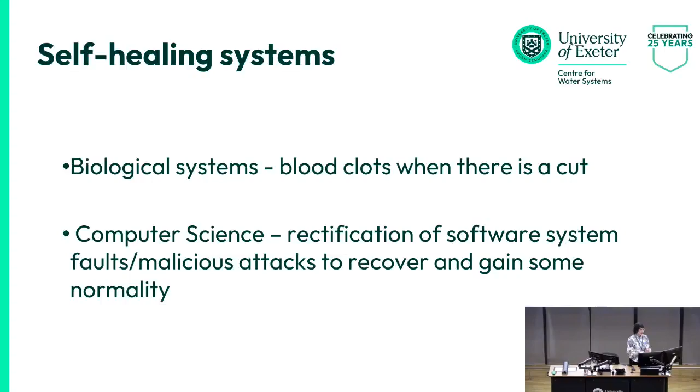Why is it important? Time and time again, we hear how aging assets are failing and causing a lot of disruption. In addition, we have got climate change that is impacting our buried assets and causing a lot of other issues.

For example, currently we are in a situation where 20% of the water is leaking in the UK because our assets are not in good condition, and we are losing valuable water that's got a lot of embedded energy in it as well through leaks. In addition, population is growing, demand is increasing, so it's very important that we balance supply and demand through other ways rather than relying on exploiting additional natural resources.

So what are self-healing systems? If we have got a system under normal state, it's functioning very well. And if we do some kind of maintenance, it will stay in that state for some time.

However, if we don't look after our assets, eventually they are going to deteriorate and move to a degraded state. We may have some capability to detect deterioration in our assets and do some predictive maintenance, not allowing them to further deteriorate. And also we may have some capability in our systems that self-protects and recovers from the degraded state, more like operational self-organizing, and goes back to the normal state.

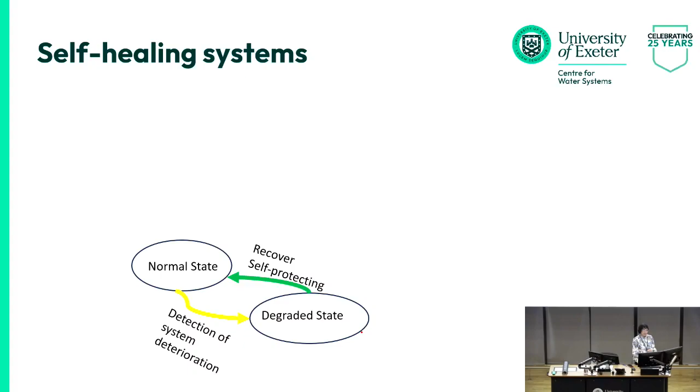However, if we don't maintain our systems, these degraded systems eventually are going to fail. And if we have got access to advanced computer science or materials, we may have systems that can detect that the system is starting to fail and somehow self-heal and go back to some normality.

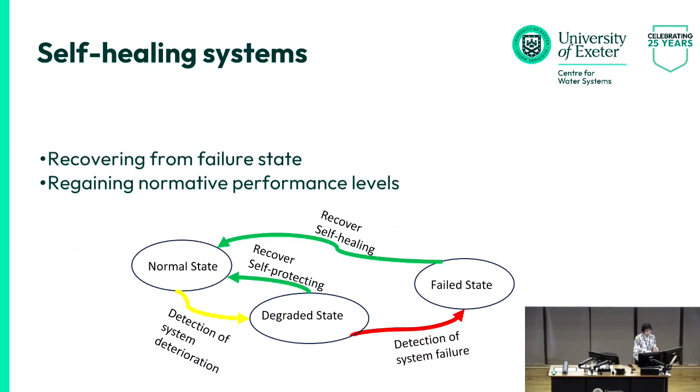Looking at other sectors, for example oil and gas, they are looking at different pipes with different coatings. For example, they have got pipes with layers of liquids that have self-healing agents, and they are activated if there is some damage in the pipe. It triggers the activation of these self-healing agents, and they start healing the parts of the pipe that are damaged.

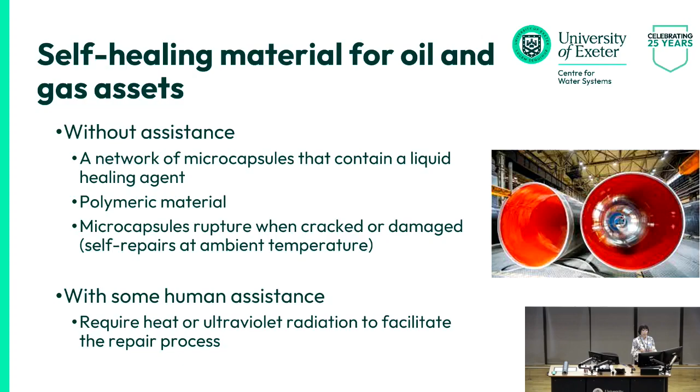In some cases it does this without any assistance. In some other cases, they have to do some support in the form of warming it, or some other human input, to be able to activate that self-healing process.

In the water sector, there have been more studies in the last couple of years. For example, currently there is a study in Australia looking at self-healing wastewater concrete pipes. The concept behind that is to use sludge, contributing to the circular economy rather than sending it to waste, using it as a self-healing agent in concrete pipes.

Another trial was carried out at Northumbrian Water in the UK last year. The idea is identifying damage in a pipe, such as a leak, and injecting water gel minerals upstream of that pipe, which will eventually fill those gaps and protect the pipe. To some degree this concept, especially the one trialed at Northumbrian Water, is assisted self-healing.

We have seen some of this in the past. For example, around 15 to 20 years ago, it was very common in the UK for water companies' asset management to clean and reline pipes - a no-dig approach, like the figure on the right-hand side. They were opening the chamber and passing the lining through the pipes, and when water was pressurized, this created a layer of protection for the pipe, blocking some leaks and improving water quality.

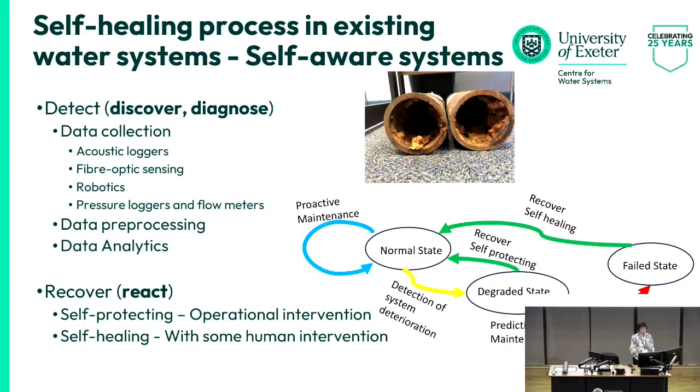So we have organized a workshop called Digital Solutions for Water Distribution Systems. The idea is to look at what we are currently doing - are we ready for when self-healing material technology is available, or for computer science extracting the best knowledge from these sensors? Are we in a position to use and benefit from those for the water sector?

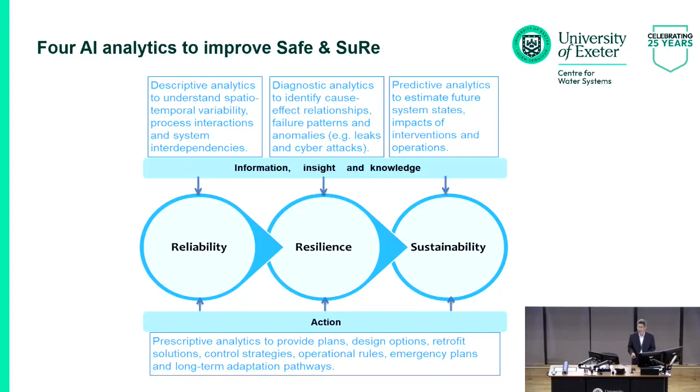It might be very difficult to predict what the future wastewater system will look like, but based on historical development it has become apparent that there are 5 pathways. I'm going to talk about each of these 5 pathways very briefly, using one example from my previous work.

The first one is greening. Green infrastructure has been gradually built into existing grey systems, providing multiple benefits — flooding, air quality, water quality, amenity, and many others. If you look at the flood damage curve, green infrastructure can help us manage more extreme flood events, like in this case, a 1-in-100-year flood event.

But in order to build resilient, flood-resilient cities, we need to tackle a lot of challenges using AI — to integrate green systems, and to integrate the physical and social systems, including community resilience measures. We also need AI to help us monitor green infrastructure and look at long-term resilience and real-time control.

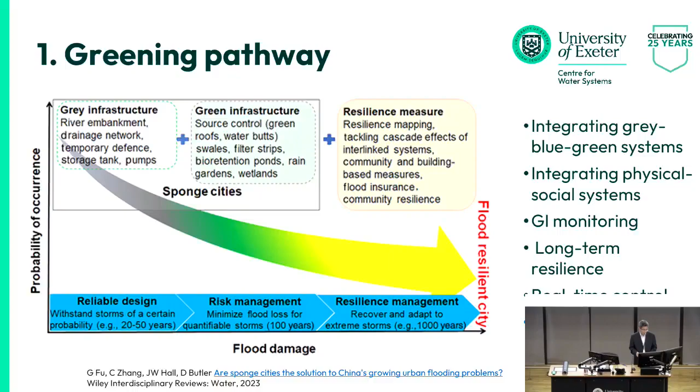The second pathway, decentralization. Obviously, there are many on-site wastewater treatment technologies and commercial units available. AI technology has been used to support planning and operation of this kind of decentralized system. But here, I'm talking about decentralized green infrastructure.

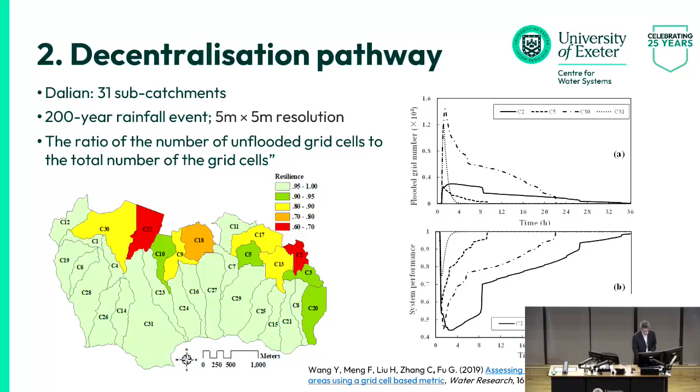The third pathway, decarbonization. We all know the UK industry aims to achieve net zero by 2030, but there are many challenges. The first one is greenhouse gas emission accounting.

We know emissions from sewers can potentially contribute up to 20-30% of the total greenhouse gas emissions from the wastewater system, but currently they are not counted. For on-site monitoring, we need new sensors and new data analytics. We have little knowledge about the greenhouse gas emission production process in the sewers and also in the wastewater treatment plant.

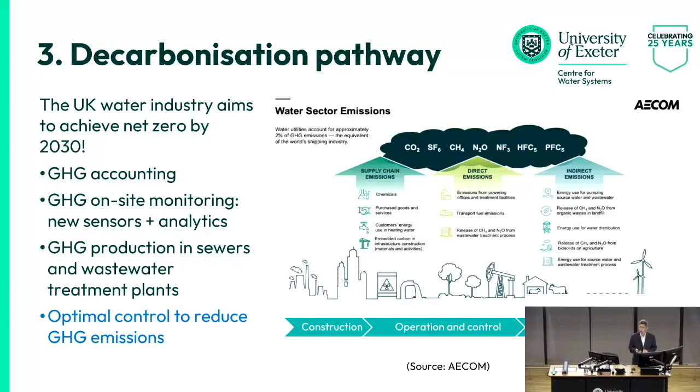So here I'll use one example to show the potential of optimal control on carbon reduction. This work was done by Chris Sweetapple. We looked at a benchmark wastewater treatment plant and applied multi-objective optimization, considering costs, greenhouse gas emissions, and water quality requirements.

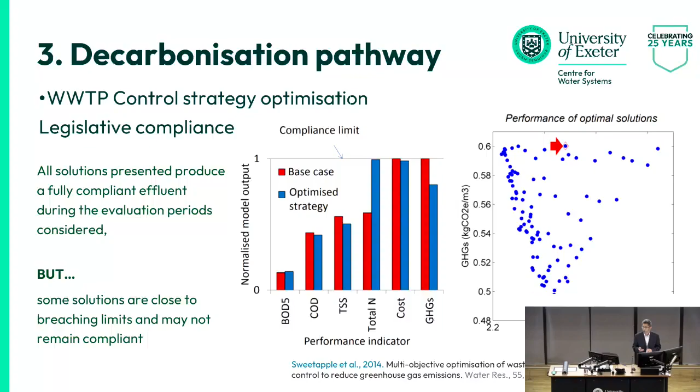You can see from here there's a clear trade-off between cost and greenhouse gas emissions. But there are some solutions at the bottom here that can reduce greenhouse gas emissions by about 20% with a slightly increased cost. These solutions all meet the water effluent quality requirement. This shows the importance of optimal control.

The fourth pathway, the circular economy. We proposed a dual loop framework to improve resource efficiency and sustainability. The outer infrastructure loop is important - we need to use a systems approach to understand the interaction between different systems and integrate various urban water systems.

The inner resource loop requires a deep understanding of the nexus between the 3 materials: water, energy, and materials. But the key challenge is to understand the interactions between the 2 loops, and the changing environment.

Here's one example on energy recovery from a wastewater treatment plant. We assessed over 300 control options to investigate the potential of energy recovery and its impact on sustainability. We used 7 indicators to measure sustainability, from A through G.

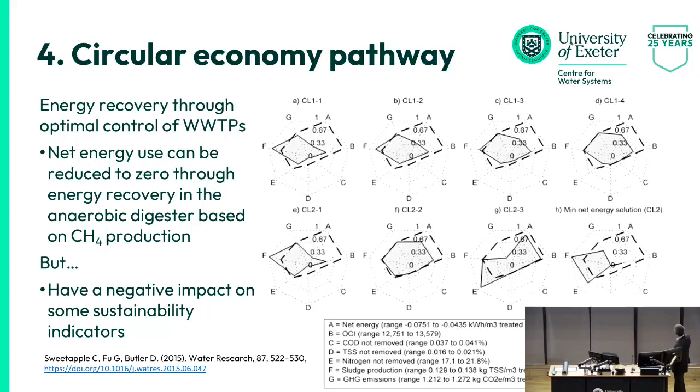A is the net energy use. We wanted to minimize all these objectives to move the curve basically towards the center of the graph. As a result, if you look at this one, it's possible to achieve energy neutrality through energy recovery, but it has a negative impact on sustainability - we have two indicators that get worse than the base case.

The final pathway, automation. This is the key area we have focused on in the past with several PhD students working on this topic. You heard from Maryam yesterday, and Farmani mentioned Chris Sweetapple already.

Basically, what we did was develop a number of global control and integrated control strategies to investigate various problems like system resilience and consenting, and look at climate change impact and adaptation pathways.

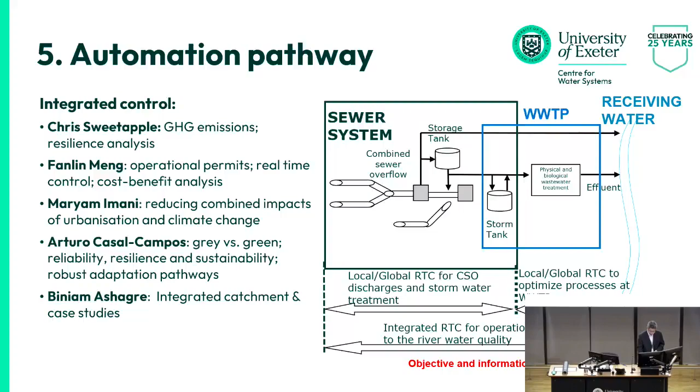Currently we have another PhD student, Chen Pei, working on deep reinforcement learning, which is an emerging new technology. It's very simple - it trains an agent through interaction with the environment, with the aim of maximizing the return, the expected return in the long term. Feel free to talk to him, he has a poster outside.

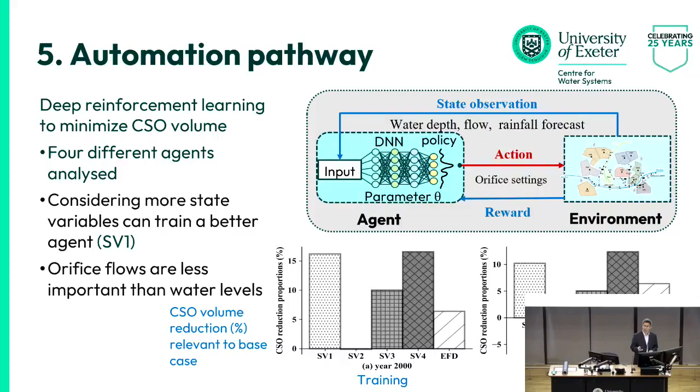So I'll just skip this one. We need to bring all 5 pathways together. It's important to emphasize the key challenge.

It's important to emphasize these pathways are not mutually exclusive. They are closely linked—sometimes, like the greening, decentralization, decarbonization. So one intervention option could potentially provide multiple benefits across different pathways.

So it's important to understand the synergies between different pathways and also to maximize the benefit using AI analytics. Obviously, AI technology has many features, as you can see here. So it's important to build tailor-made AI systems for specific water problems.

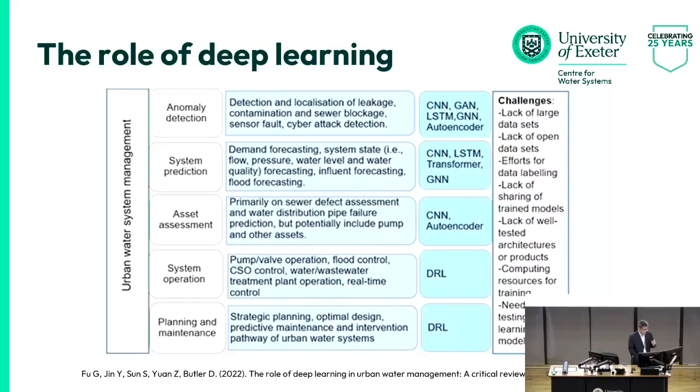So here is the overview of some water management problems which can be solved using deep learning technology. You can see I mentioned deep reinforcement learning here, so it can help us in many different aspects. We have a paper if you are interested to read about these.

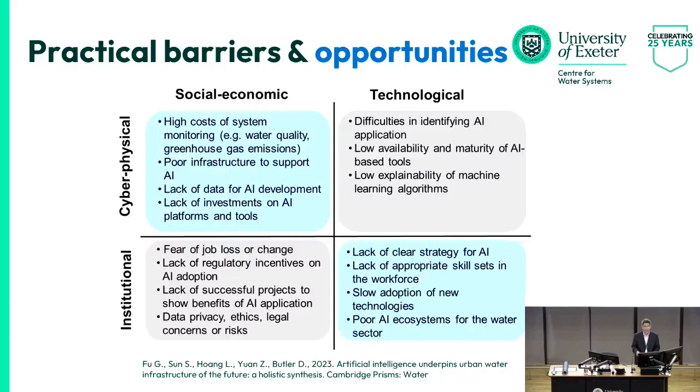So, what should we be focusing on at Exeter? My personal view is that we should make the best of our strengths to accelerate the integration of water research with AI to tackle the environmental and societal challenges.

We need to play a leading role in building cross-disciplinary research communities across water, environmental, computer science, social science, and many other subjects. Just before I finish, I wanted to share one thought from Garry Kasparov.

The world chess champion who played the famous game against the supercomputer, Deep Blue, back in 1997. You can see here: a weak human plus machine plus a better process is much more powerful than a strong human plus machine plus an inferior process. So do you agree with him? Or do you agree with me, or not?

I think in the future, we might need to treat AI as a team member rather than as a tool or algorithm. So a key challenge to tackle complex water systems—I think we need to develop leadership skills to build a team where AI and humans can work together, complementing each other through effective interactions.

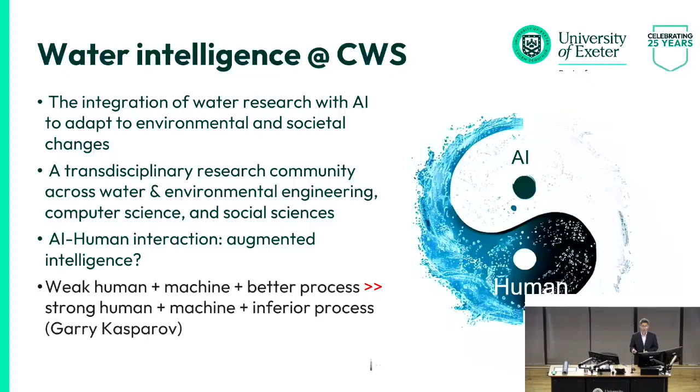Finally, I want to thank all of my collaborators and colleagues in the past, in particular in the past 18 years at Exeter. Thank you.

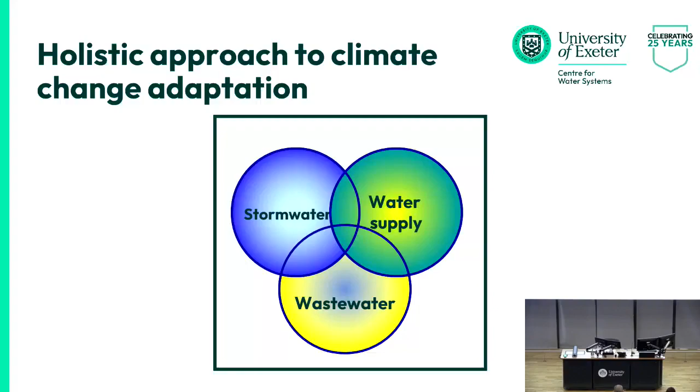Now, what I do, essentially, I look into these different domains: urban water flows. Obviously, there is the urban water system. So my niche is more or less looking into climate change adaptation. How? By integrating these individual flows, i.e. the infrastructure, not literally the flows, but the infrastructure, and making the most of the benefits that integration can bring by developing technologies and looking into the impacts they have or how they interact with the wider environment. More recently, I am venturing into the analysis of the system of systems - treating water as just one system and then venturing out to other systems. We need energy to produce water, and we need water to produce energy. We need both to produce food, and now the land nexus is adding more complexity - there is a competing demand on land for biofuels versus producing foods and so on.

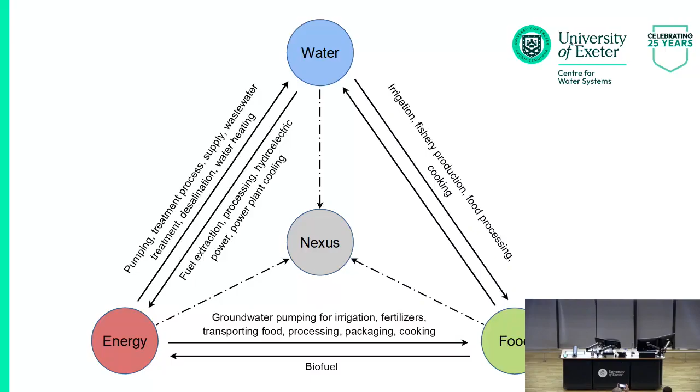Okay, so what we are going to talk about is essentially giving you a flavor of the processes. I've got four projects - some have finished, some are running in different continents, in different countries - and then we'll pick up something on the scale issue.

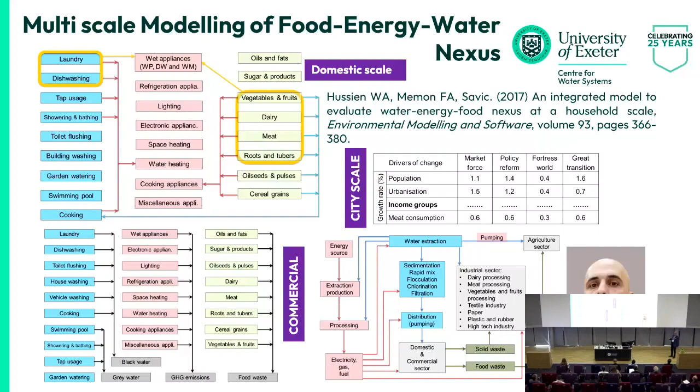This is the very first one, which we did for Iraq, funded by the Iraqi government. We looked at the micro scale, at a domestic scale - you've got different end uses of water, different end uses of energy, and we eat lots of different types of foods, and there are processes, hence energy implications. We looked at behaviors at a domestic scale, around 350 households in Iraq in different settings, looking into their demographics, socioeconomic conditions, and consumption behaviors, and then we came up with some interactions. Then we repeated a similar exercise on a slightly larger scale - non-domestic, i.e. commercial sector - and moved on towards the supply side of resource provision at a city scale, at a different level. It's not about the numbers, it's more about the processes here, I would say.

The third project I have was kind of an undergraduate project, not even a PhD project, at a different scale, but quite impressive. He was my project student, and then he moved to the MSc level as well. Here, what we looked at - Spain is very famous for their agricultural produce throughout the world.

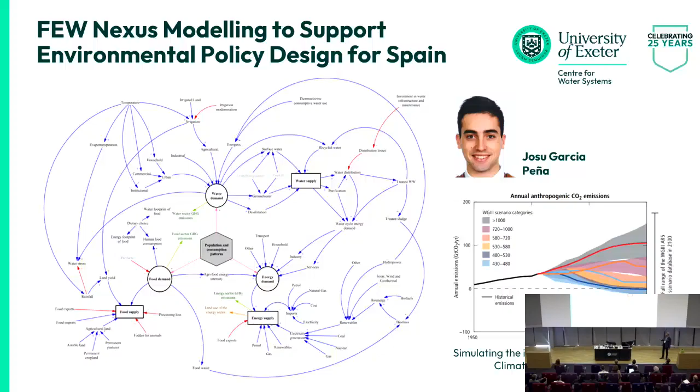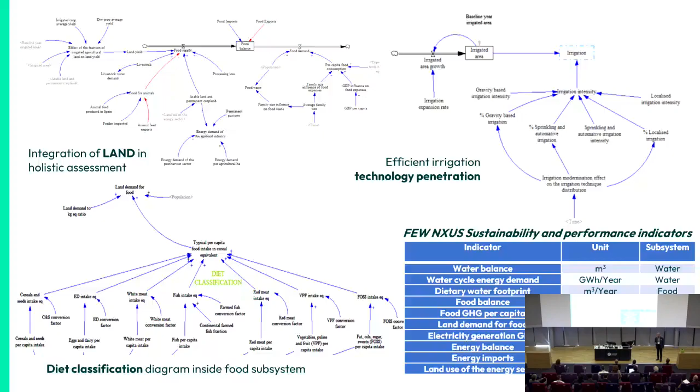We applied that bigger tool using the Spanish version of climate change scenarios for carbon emissions and so on, then measured the performance of the Nexus for policy derivation using a number of indicators. Again, the focus has been on performance - the quality of the output is very much dependent on the data.

The fourth one and the last one - then I'll leave you with a slide on what to do next. The fourth one is an ongoing PhD, and I admire this lady, my PhD student. Just before going for her wedding ceremony three days ago, she managed to email me some slides just to save my soul. So best of luck and best wishes to her, which I'll communicate from you guys as well.

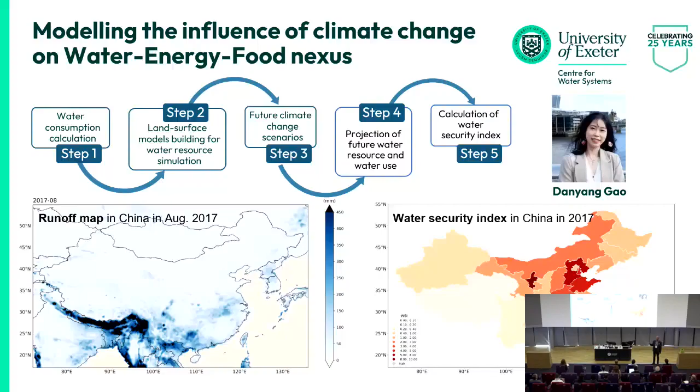So what we had were the climate change parameters. We use a simulation tool called JULES, which takes climate influencing parameters into account and gives lots of hydraulic analysis, one of them being surface runoff. Using that, we did backcasting on how much water is used for crops, energy, rural and domestic water supply, demand balance, and so on, and came up with a yearly water scarcity or water security index for different provinces of China.

Now here you can see there is lots of water availability on the graph on the right side, but there are provinces where you can see a clear deficiency in water. Using that tool, we applied this for a number of conventional climate change scenarios, and on top of that, socioeconomic scenarios and combinations of those. Again, this is ongoing work - let's see what comes out as a result of these scenarios on a longer scale, say 50 and 100 year forecasts.

Moving on, the last slide I have here - where shall we be going? I'll give myself a pause a little bit for you to digest, and then we may be able to discuss. Obviously, these days we have the cost of living crisis, and obviously it is going to influence human behaviors. How it is going to permanently or temporarily influence the water, energy, and food nexus is something that can be looked into.

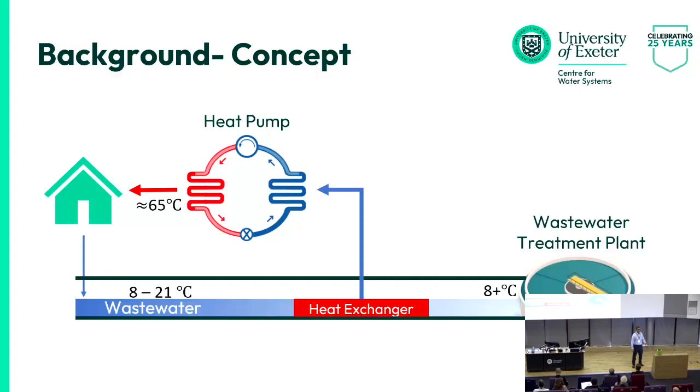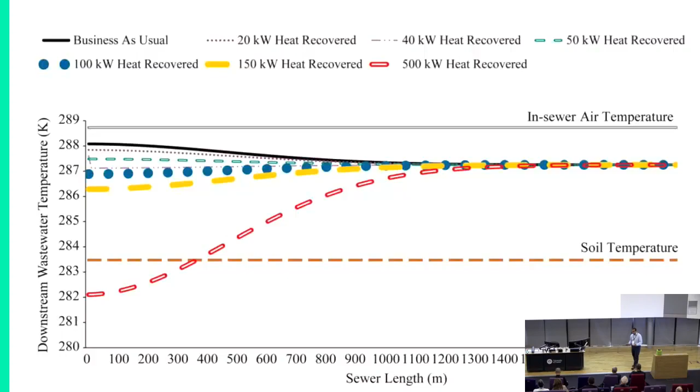So, early models have shown that when you recover heat - the solid black line is business as usual with no heat recovery. If you recover, let's say 20 kilowatts, then the difference is insignificant. But if you recover 500 kilowatts, there will be a large drop at the beginning, and then the temperature will increase because the heat is reclaimed from the surrounding air and soil, and you reach the business as usual case after maybe 1 kilometer of length.

Why is heat recovery important? It's because a large portion of carbon emissions comes from heating, and the coefficient of performance, that is the ratio of output to input, matters because you are using electricity for a heat pump. So the output heat over the input electricity, that is the COP of a heat pump.

Currently, the government is promoting air source heat pumps, but those have relatively low COP, around 2 or 3. But with wastewater heat pumps, you have 4 or even more. Sewers are everywhere, close to the heat demand location, so we have a large potential of heat from the sewer that is close to the consumer.

Also, the heat recovery from wastewater can benefit other processes. For example, the reduction in wastewater temperature may reduce the formation of hydrogen sulfide.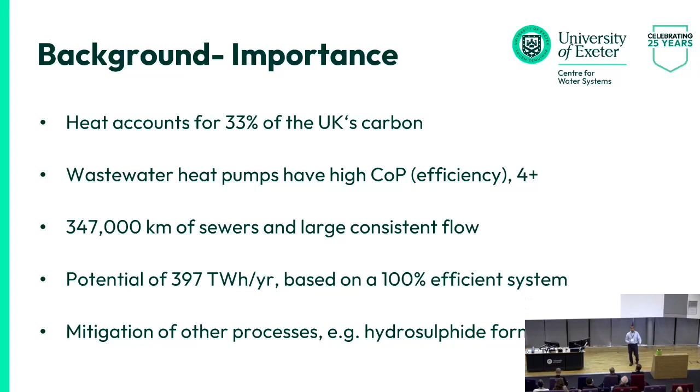The heat transfer between wastewater and in-sewer air is complex. We have addressed this and managed to estimate it accurately. We then applied this to a large sewer network of 3,000 pipes.

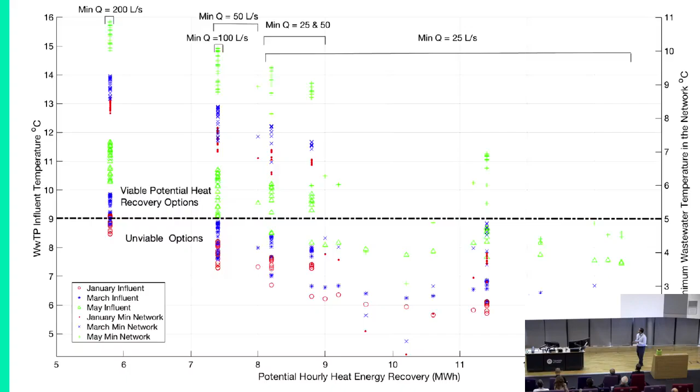However, what we have found is the modeling accuracy can sometimes be low. This is a Taylor diagram - you don't need to be familiar with it. All you need to know is that an accurate model will show a modeling error closer to 1, no more or less than a deviation of 1. So the closest to this point, the more accurate the model.

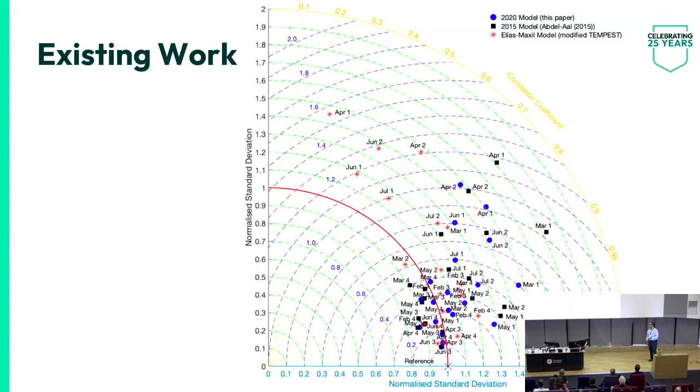You can see the model has performed well in the majority of cases. These are different models - mine and other authors' as well - at different months. We noticed that April and June showed particularly higher modeling error for my model and also for the other models. This suggests there must be some missing process that we haven't accounted for, and the exact reason is not clear yet.

So this inconsistency in modeling error needs to be investigated. We also found that the peak of heat recovery is lagged by around a couple of hours in comparison to heat demand. So if we can manage to store the recovered heat, that would enable us to optimize the heat recovery process and attempt to meet the heat demand.

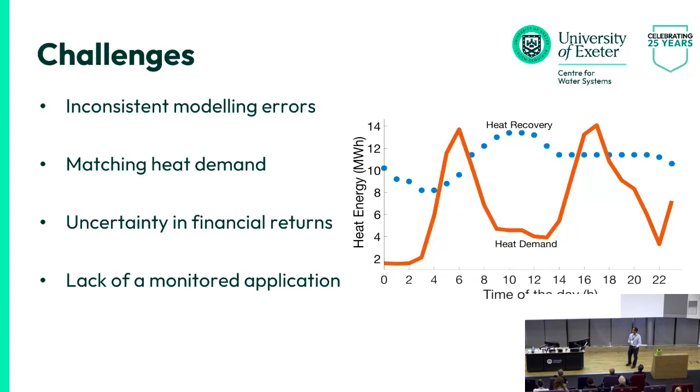What else? We don't know the financial return, and there hasn't been published literature in terms of heat recovery from sewer networks and how that can benefit stakeholders.

So the future goal would be to advance the heat transfer process and investigate these uncertainties in modeling errors - we'll talk about each goal in more detail - and also optimize the heat recovery in spatial and temporal terms, and develop a business model to estimate financial returns and identify stakeholders. Once that's all done, we can apply it in a field study, because this is one of the main barriers for companies, that they don't know how this is going to benefit them financially.

So we need to improve the understanding of heat transfer processes and also adapt the model to be a transient model, because when we consider heat storage and optimization, the model needs to be transient. And we need also to develop a smart storage technique.

To do all of this, we need to apply the heat recovery process and understand the heat transfer process, all in a controlled laboratory environment, but at full scale. Currently, as far as I'm aware, there's no controlled environment where this has been implemented.

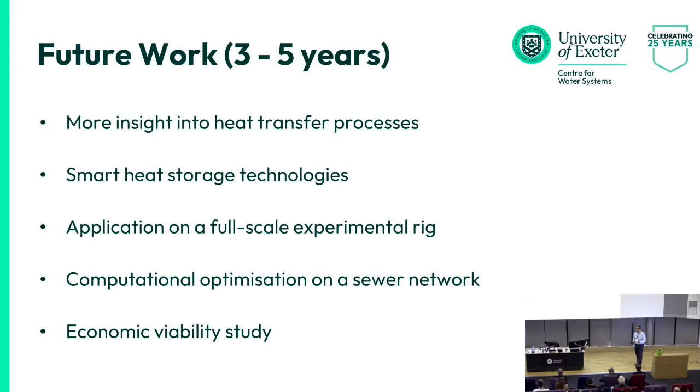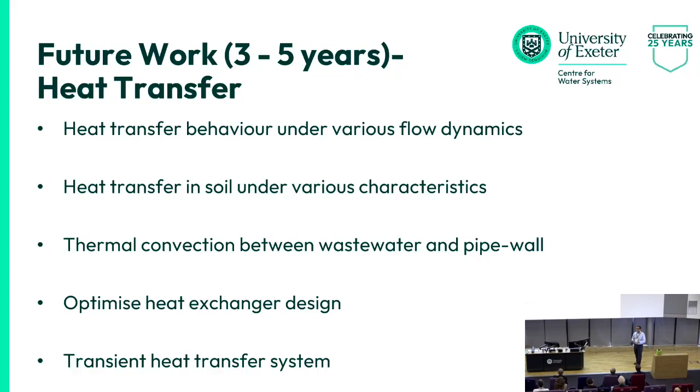The heat transfer process is complex in sewers, so we try to test the system under various flow dynamics, under various soil types, and measure the thermal conductivity and other parameters. Also, the thermal convection between wastewater and pipe-wall has been based on assumptions most of the time. And the heat exchanger itself, because it's a small confined space in the sewer, needs minimum size with large capability of heat extraction.

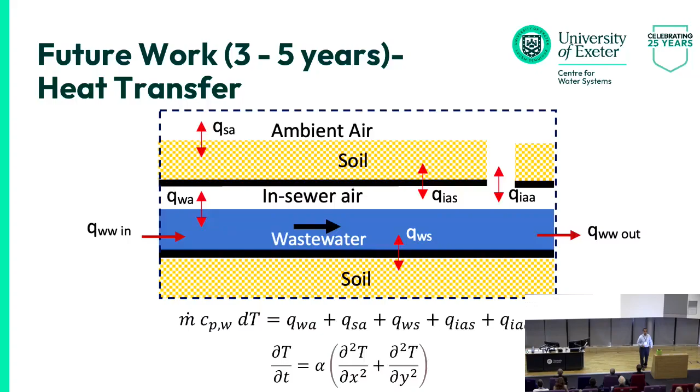So the new model will look something like this, and will account for other heat transfer processes: between in-sewer air and soil, between in-sewer air and ambient air, and also the convection between wastewater and the pipe, or at least investigate the sensitivity of these parameters.

For heat storage, the idea is to use existing infrastructure in the sewer and develop a smart system for heat storage through real-time control, or use storage material, or a combination of both. It's estimated that heat storage material would require around 3 to 4 cubic meters per household to cover the annual heat demand.

This is an experimental laboratory rig in Sheffield that I'm aiming to use, because here we can change the soil, change the characteristics of the soil, and change the thermal conductivity in the groundwater. So we study the heat transfer processes without any heat recovery, and then we can deploy a heat recovery system and a heat storage system under a controlled environment.

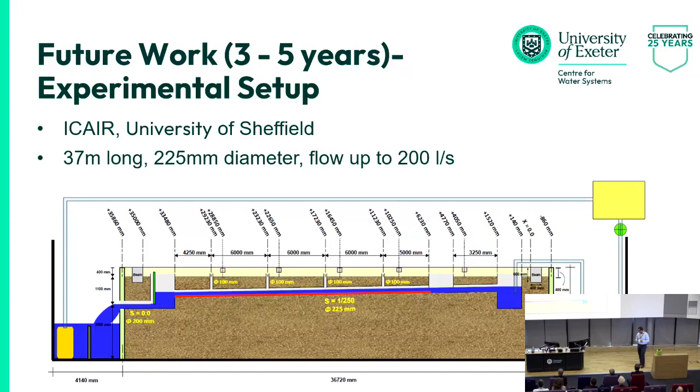So once that's done on a single pipe, then we can optimize the heat recovery in a sewer network. This is complex as well, because when you recover heat from upstream, that will impact the temperature downstream, and therefore impact how much heat you can recover downstream.

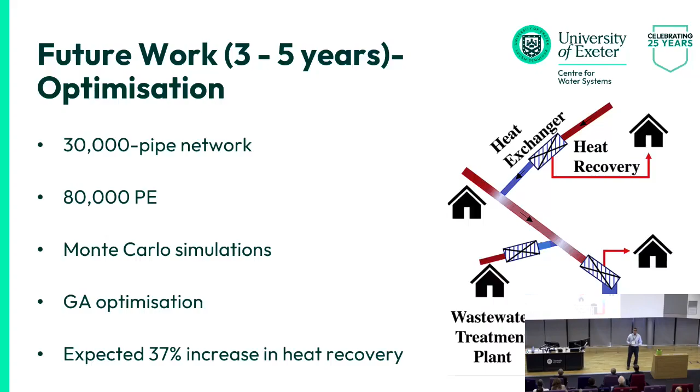And that is only first generation, but then you have first and second generation, then third, fourth, up to maybe seven generations of sewer pipe in this network. So it can be done, it won't be an optimal solution, but we can start with Monte Carlo simulations or genetic algorithms.

And then once the network model is optimized, we can apply it on a field study where we monitor temperature and validate the optimized model, and also validate the business model.

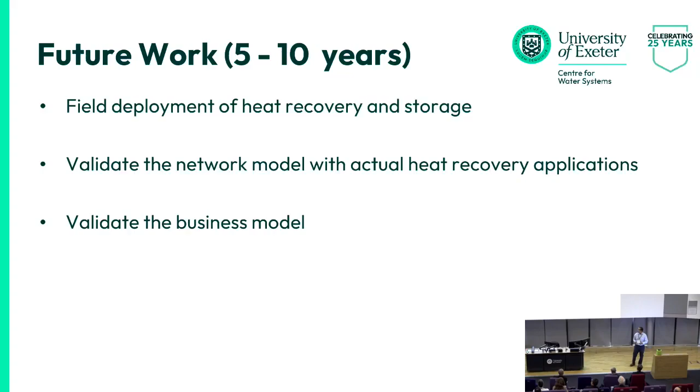Once implemented in a field study, it can break some barriers and be spread out on different networks in the country. We need also to review the performance and scale the potential of integrating renewable heat with other renewable sources at the time.

Obviously, with something like this, we need to collaborate with water companies and consultancies and break these barriers so they're more confident in taking this on board. Also, the heat exchanger manufacturers need to be updated on what can be done, since it's a unique setting. City councils, health education, they're all important in this project, and universities as well.

To summarize, we need to focus on the heat balance equation and make sure all the processes are included, then apply heat storage using a transient model. Apply all of this at lab scale, which will enable us to confidently apply it in field deployment, and also monitor the main parameters and validate our business model and network model. Once that's done, we can expand the technology and be more confident in applying it across the network. Thank you very much.

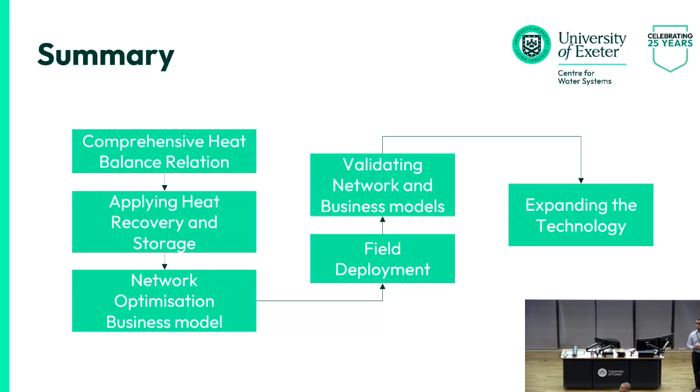Thank you very much, very interesting. My name is Mohamad, I'm from Krüger in Denmark, where we do optimization of wastewater treatment plants and sewer systems. In Denmark, we already today have heat exchangers at the wastewater treatment on the effluent. For some reason, they don't want them at the inlet, and they tell me they don't want to extract heat from the water before it enters, they don't want cold water to enter the wastewater treatment. During winter, they're very unhappy when the snow is melting, going into the sewage, cooling down the sewage, and getting slower biological processes. Have you got any idea how much you will change the temperature of the sewage when you start using the exchanger and extract heat from the sewage?

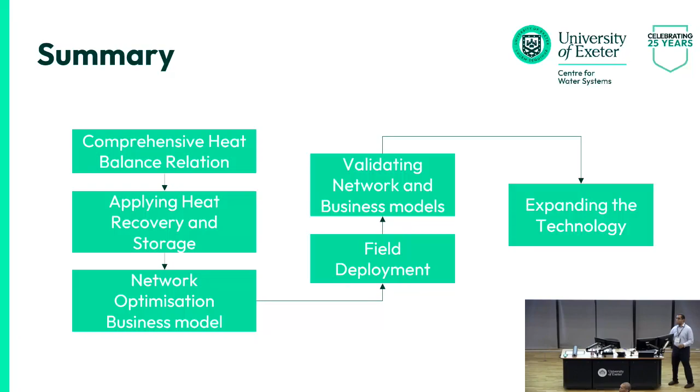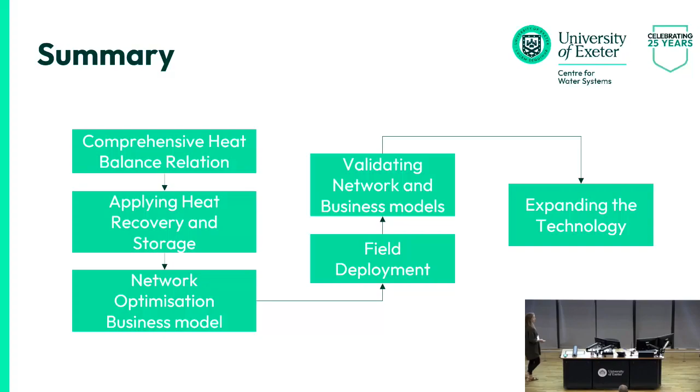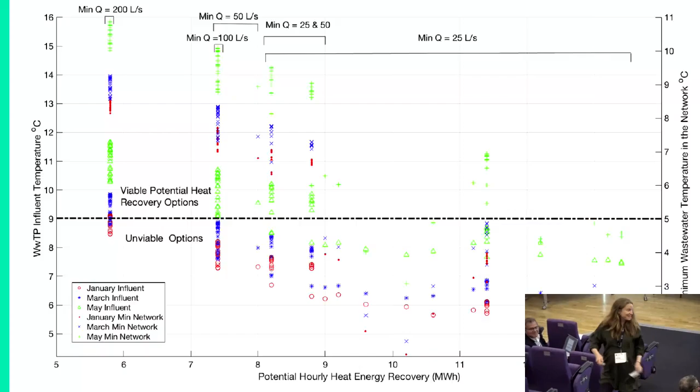You just want me to do more exercise. No, I think I understand it. The question is how much will it change the temperature of the sewage? Yeah, so it will depend on the flow and how much you recover.

What I want to show you is that you have a number of options. For example, if you are worried about the temperatures and it is winter, you only recover 6 megawatt hours, and that will have a lot of viability. But if you increase recovery, the model or your control of how much you recover has to be dynamic, ideally in a real-time control system. If your wastewater temperature is 5 degrees Celsius, you don't recover anything. But if it is 10 or 12, then you can recover upstream, and the wastewater will increase in temperature because of the surroundings. So it has to be a dynamic, real-time control system.

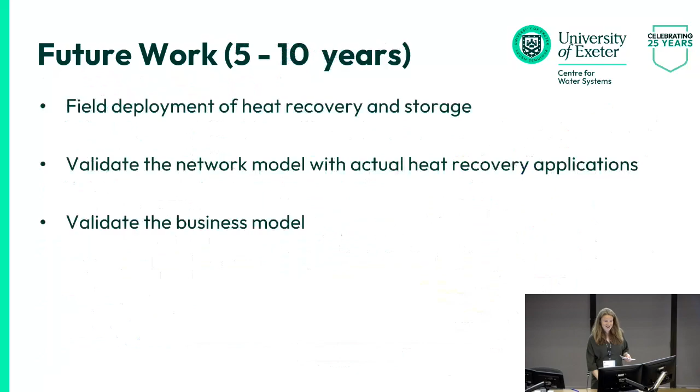Good morning everyone, I'm Akbar Javadi from Center for Water Systems. In this presentation, I'm going to talk about the research we have been doing in the last 15, 16 years on groundwater modeling and groundwater management in coastal aquifers, mainly under the effect of seawater intrusion and climate change, and our journey through this process and the future direction as we see it. I would like to acknowledge the contribution of some researchers, PhD students, academics, and international colleagues in this field.

My research is mainly computational geomechanics. I'm a geotechnical engineer, and in the last 22 years we have had over 70 researchers contributing to research in the fields of geotechnical and geoenvironmental engineering. We work in areas of geoenvironmental engineering, geotechnical engineering, application of engineering optimization in geotechnics and geoenvironment, and also application of AI and machine learning, either as a standalone tool or integrated into computational simulations.

In this presentation, I'm going to talk about modeling of groundwater resources in coastal aquifers, a model we have developed for simulating seawater intrusion, and a new methodology we have proposed to control seawater intrusion, and studies we have done on the effects of sea level rise and its effect on seawater intrusion, and applications to some real-world case studies, and then I'll conclude with some suggestions for future research in this field.

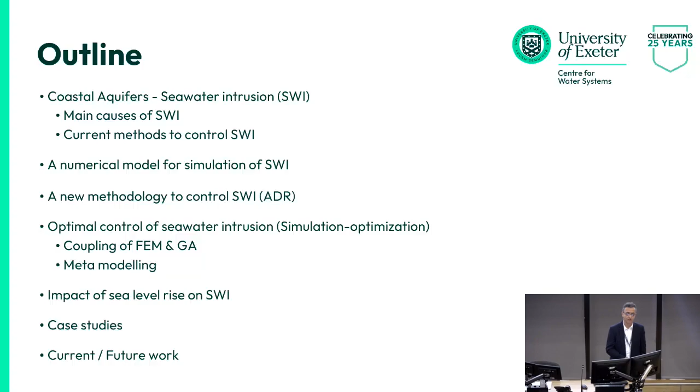Generally, about 70% of world population live in coastal regions, and many of these regions depend on groundwater as a main or, in some cases, the only source of water supply. In coastal aquifers, we have groundwater, freshwater, in contact with seawater and saline water, separated by a zone of dispersion, which is a dynamic zone, not static. There's a growing population, which results in increasing abstraction, and if you increase abstraction, this zone will move towards the aquifer and salinity will intrude, causing contamination. On top of that, we have sea level rise, which increases the head of water on the saline side, which again helps with intrusion.

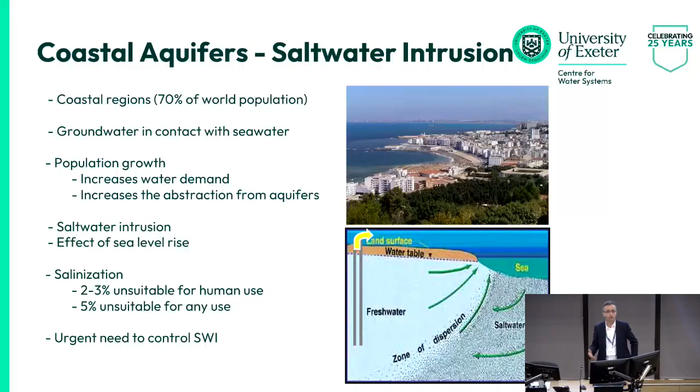The problem is that a very small percentage of salinity in soil or water can make it unusable for human use or any other use. There are many countries around the world who have either lost their groundwater resources or are in the process of losing groundwater resources. So it's a very important challenge.

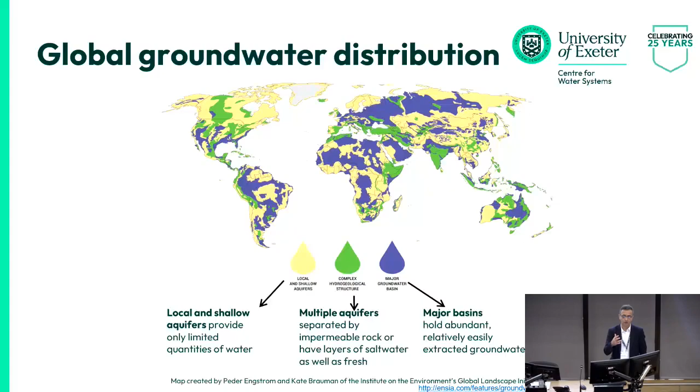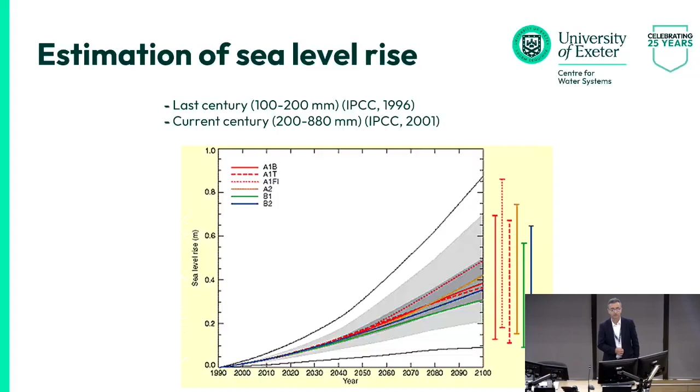And with climate change, according to IPCC, in the current century it's expected that sea levels will rise something between 200 millimeters to 880 millimeters, depending on different climate change scenarios.

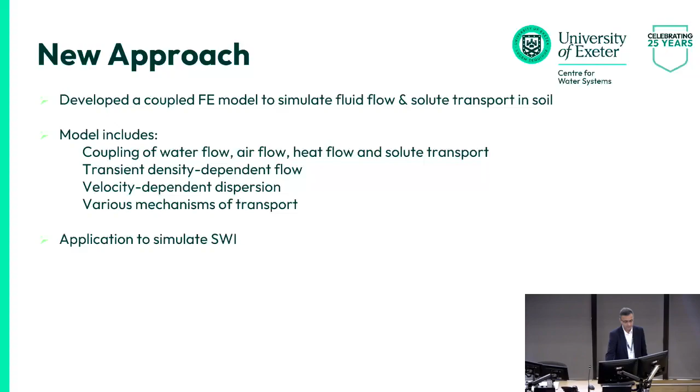So in this research, about 15 years ago, we started with developing a computer model for simulating flow and contaminant transport, and then we adapted it to the problem of seawater intrusion. We studied a lot in this field, a lot of case studies, real world or hypothetical cases, and we proposed a method for controlling seawater intrusion based on a combination of abstraction of brackish water and at the same time recharging the aquifer using treated wastewater or other sources of water. Also, in countries that suffer from shortage of water, we could have an option of desalinating the abstracted water and using it as an additional source of water.

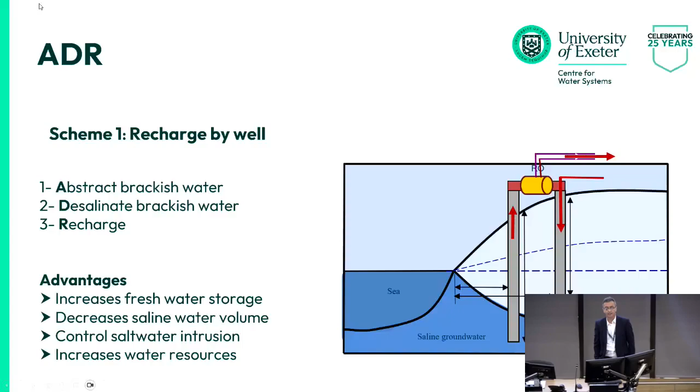This is a method that we have proposed. Obviously, we need to know what is the optimal arrangement in this proposed method. We use some simulation optimization models, and we've compared our proposed method with some of the existing models, which are based on abstraction only of saline water or recharge of aquifer only.

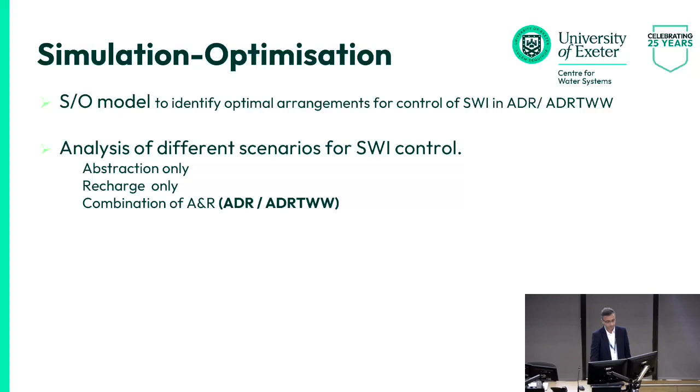So we applied it to a benchmark case study. This was one of the early applications of that, where we formulated the problem as an optimization problem of identifying the optimal locations for abstraction wells and recharge wells, optimum depths for these wells, and the optimal rate at which we can abstract water and recharge, to minimize the cost and minimize the salinity in the aquifer, subject to some practical constraints.

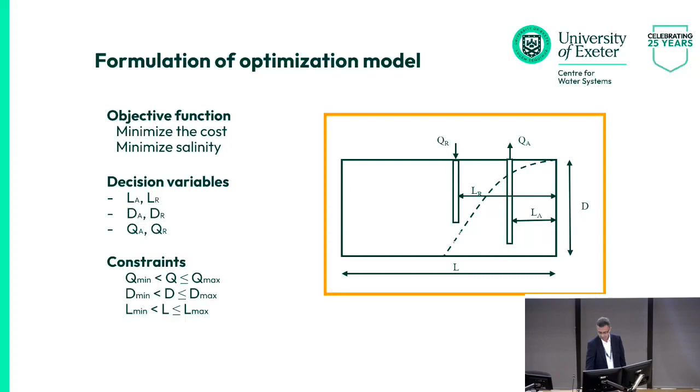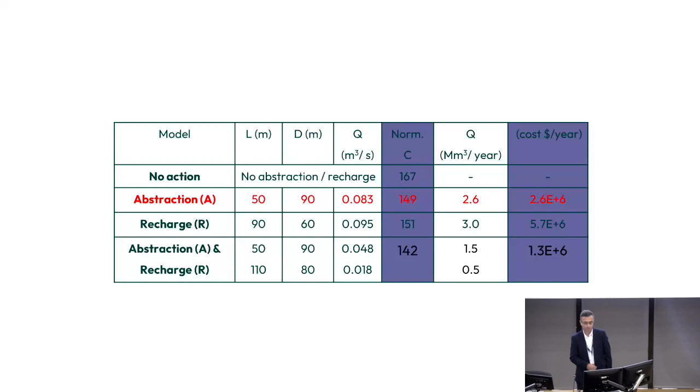Similarly, the recharge method, which is a conventional method, requires an optimal arrangement shown here, but reduces salinity to 151 at a cost of $5.7 million per year.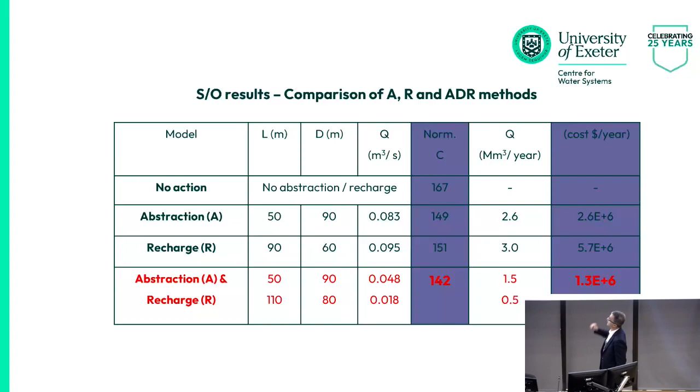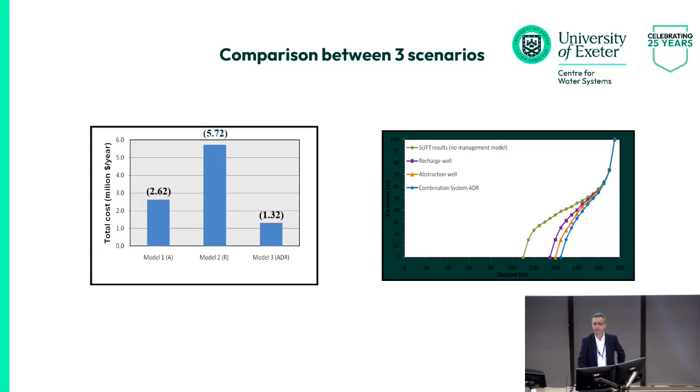Our proposed method requires an abstraction well in conjunction with a recharge well, but reduces the salinity significantly more, to 142, at significantly reduced cost. If you compare the cost directly, our proposed method, ADR, the bar on the right, is about half the cost of abstraction only and about a quarter of the cost of recharge only. And it pushes the interface between freshwater and saline water further towards the sea, protecting the aquifers very efficiently.

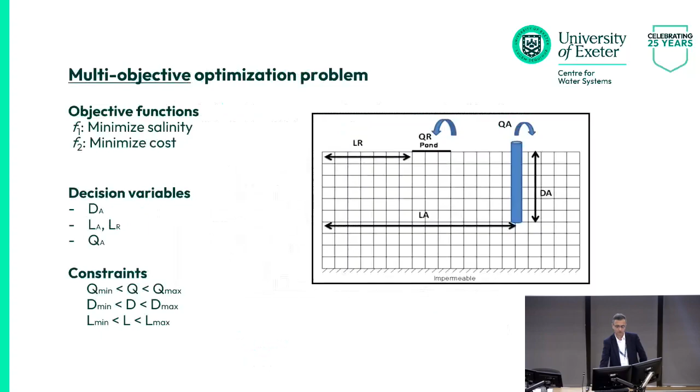We have done similar applications using multi-objective optimization, as we have two objectives here. I'll skim quickly through this very similar optimization arrangement, but this time using a pond rather than injection wells. With similar comparisons, the advantage here is that we get a Pareto front, which is basically a number of possible optimal solutions from which we can choose. Again, we have shown that our proposed method - abstraction, desalination, and recharge - results in much reduced cost and much reduced salinity.

Also, in terms of a study of sea level rise and its effect on seawater intrusion, we have looked at different scenarios: the effect of sea level rise based on just increasing head of water on the sea side, without considering the flooded land due to sea level rise, and also the effect of land which is flooded. As sea level rises, depending on the slope of the shoreline, a large area of land can be flooded, which practically moves the interface further inland.

And also, we have looked at the combined effect of sea level rise and over-abstraction from groundwater. So this is one of the case studies we have looked at.

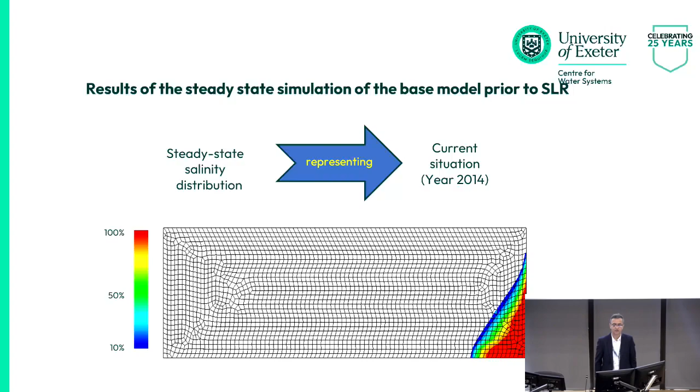This was a study we did in 2014. This is the kind of steady state current situation in 2014 in terms of distribution of salinity.

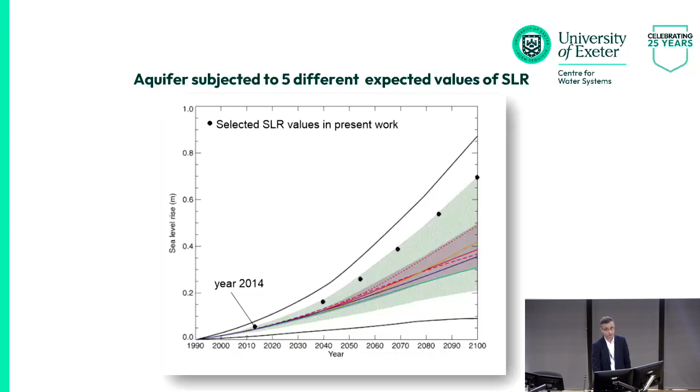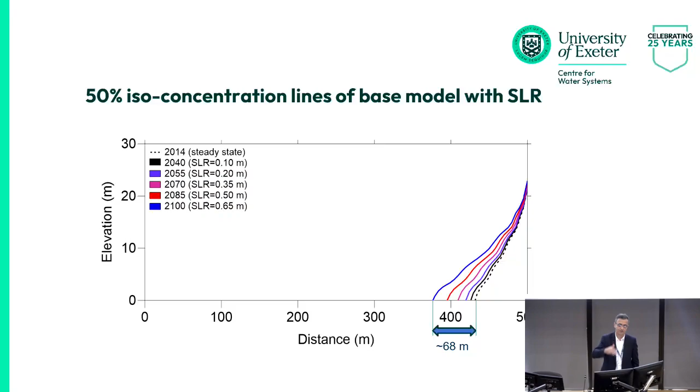And we chose a scenario for sea level rise, assuming that by end of the century, in 100 years, about 65 centimeters of sea level rise we will have, which is within the band of IPCC prediction. This shows the gradual movement of the interface between saline water and freshwater over the century, just assuming the increase in head of water, ignoring the flooded land.

But if you consider the effect of flooded land by sea level rise, depending on the slope of the ground, the shallower the slope is, the larger area of land is flooded, and this interface will be moving further and further inland.

And if you combine this sea level rise with a relatively moderate lowering of groundwater levels due to over-abstraction, something like 0.6 meters over a century, which is not unreasonable, you can see that the effect will be significantly more. Almost the majority of the aquifer area or volume is contaminated in this case.

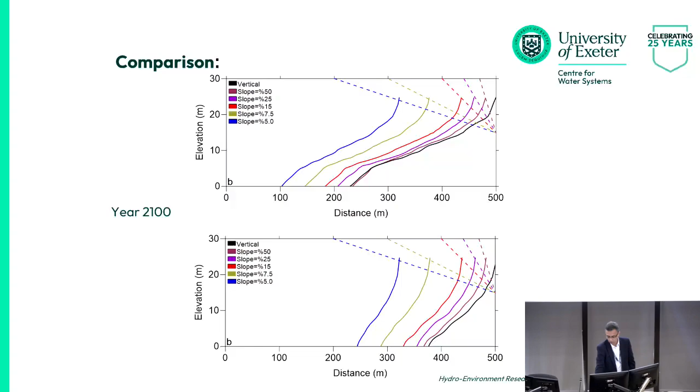And if you consider the combined effect of sea level rise and over-abstraction at the top with just sea level rise here, you can see that sea level rise and groundwater over-abstraction could have very detrimental effects on groundwater resources. We have applied these methods to a number of case studies in United Arab Emirates, Nile Delta in Egypt, and Pingtung Aquifer in Taiwan.

And we have lots of publications. I can't go through some of these, but they are available from our papers. But future work in this direction.

One of the important points to consider in terms of groundwater management is groundwater systems are not isolated from surface water. Any realistic management of groundwater should consider the interaction between groundwater and surface water.

In the Taiwan case study, we tried to look at the effect of flooding and seawater intrusion and how we can work one against the other, how we can solve two problems, manage the flooding and seawater intrusion together.

Some of the models that we have been developing are very computationally intensive. So perhaps surrogate modeling and use of AI will be a very efficient use of computational time. We have done some use of surrogate modeling, and we have shown that computational time can be significantly reduced by surrogate models without compromising the quality. And we have got some papers on this as well.

Any modeling of groundwater, management of groundwater should consider uncertainty. Ground is a very variable medium. The properties of soil can change from one point to another. The type of soil can change from one point to another. We have a lot of uncertainty about climate change scenarios, rainfall patterns, change in rainfall patterns. All of this brings uncertainty that should be considered in analysis. We have got a recent PhD which is completed looking at uncertainty analysis.

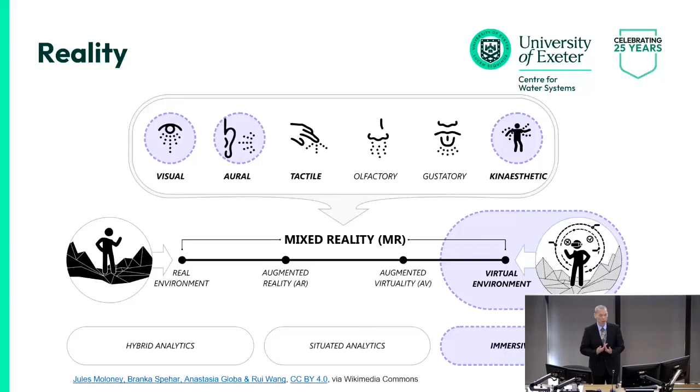So this kind of technology is being quite widely applied. I think most of us are not suitable for this kind of theme park adventure. But now, if you have some opportunity to go to the theme park, Disneyland, Universal Studios, they have some sort of new experience. You can do that, and even have what they call a 4D environment. It's kind of mixed reality to help increase your experience, and maybe also that can help us with our learning.

So now, why is it more popular? Because now there's a lot of emerging technology making it more affordable. So we can have different headsets now available in the market at a reasonable price. It's not 10,000 pounds for one gadget like those flight simulators for the airline company that trains pilots. Now we can just put on a headset using the Meta Quest, or the Vive, or the new one coming, the Apple Vision Pro. There's a variety of devices that could allow you to do these kinds of activities.

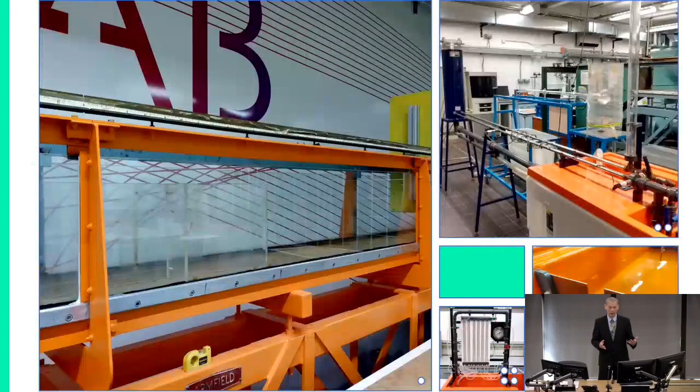The other thing is that universities have fantastic facilities to do experiments for students, but each piece of equipment requires space. So how much space do we have? We can only have 1 or 2 flumes in any university - not the university can have 10 or 15 flumes. But I have 50 students in my class.

So how can I train the students with one single flume? And with each single flume, we need to do various experiments - open channel and weirs, sluice gates, dam, etc. There are so many that require a lot of time and space. So can we achieve that using technology instead of simply relying on this physical equipment?

I'm not saying that's not good - that's fantastic for helping people learn. But because of the time and space we have, how can we utilize technology to accelerate the learning process?

Another thing is that in the last couple of years we experienced a pandemic. Even though we have space and time, we cannot access the facilities. And that could also happen if we have some disaster - we had colleagues in Turkey who had a huge earthquake that destroyed all this infrastructure, so those facilities won't be available for students.

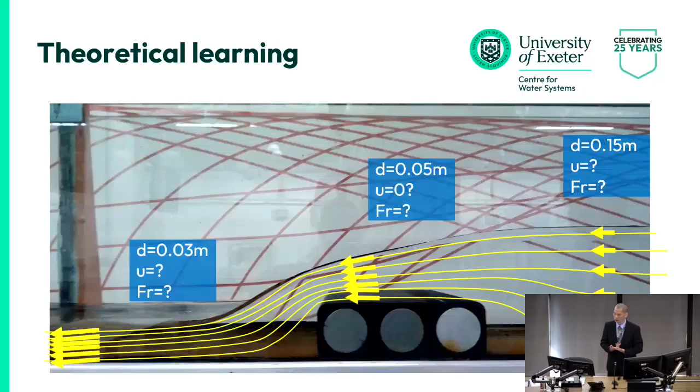So to mimic the vibration of the environment, so that we will be able to observe people's behavior. If you are walking on this wobbling bridge, how will you react? Or if you are walking in a different environment, standing on a boat or sitting on a train, how this different environment condition will affect your movement, in order to help us to better design our infrastructure. So this is for the structural engineering colleagues.

They're doing this, but we are thinking, can we also utilize this to see how people will react if we put them in some flooding situation? It's not safe otherwise - if some of you saw Slobodan's presentation earlier, some colleagues very bravely put their students in a very fast moving flume to see people's reactions going through flood water. So can we use this kind of technology in a safe environment to observe people's behavior?

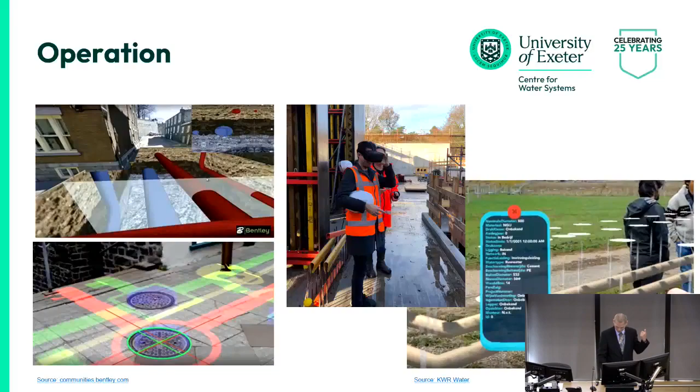So to conclude my talk, I want to invite you to share your opinion with us in the workshop later. We have the workshop in the exploratory labs too, on the first floor, and we will listen to your opinion. What's your vision of the future to use this extended reality to help us in terms of research, teaching, industrial training or applications? Thank you very much.

Can you hear me? Quite impressive presentation, I think, and very futuristic as well. Do we have any thoughts on the barriers to achieving that kind of restoration, in terms of - I think finance is going to be the major barrier. Any thoughts on that?

That's a good question, that's what I want to pose to you for our workshop discussion. But indeed, there's various barriers we are experiencing now. First of all, most of us, I believe, are water engineers, so how are we going to translate our knowledge into using different technology we're not familiar with, in order to help more people? That's the one thing I would like to start with, but I would like to invite more of you to come give us your thoughts later.